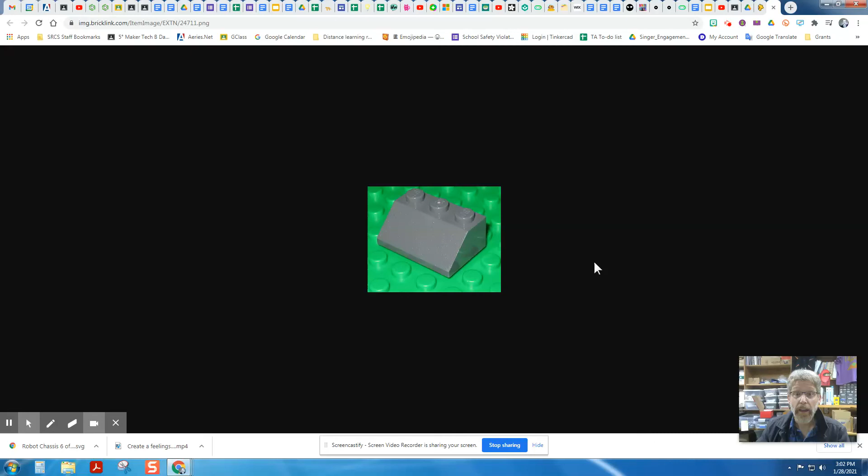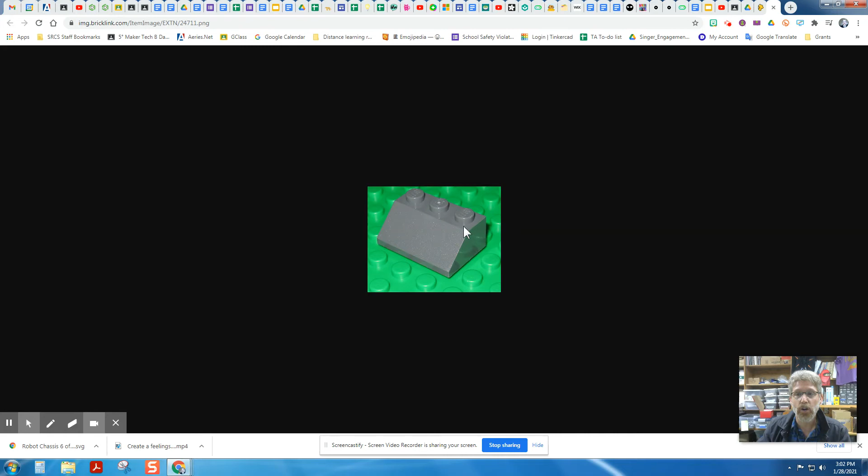Hey students, this is a tutorial on how to make a 2x3 Lego piece that has this sloped edge using a procedure called a chamfer. Ultimately, what we will have it look like is this. We'll be doing this in OnShape, and we'll be learning some more advanced techniques that will save you a lot of time and energy.

So we're going to start in OnShape, and you're going to want to create a new document. We're going to call this 2x3 Lego with, and then chamfer is C-H-A-M-F-E-R.

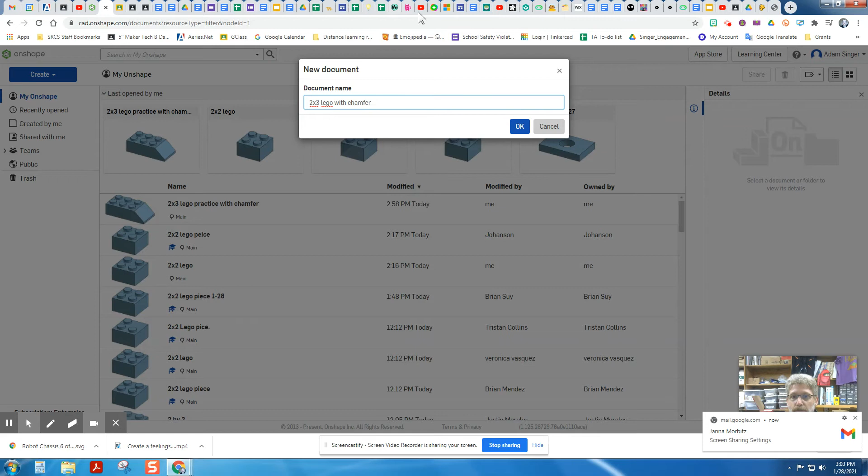Okay, so we're back here. The very first thing, this is super important, you need to get your units right. We want to make sure that for this Lego assignment we're building in millimeters. Go to this 3-line menu, go down to workspace units, and change the default unit length to millimeters, then click the green checkbox. That should get you set up well.

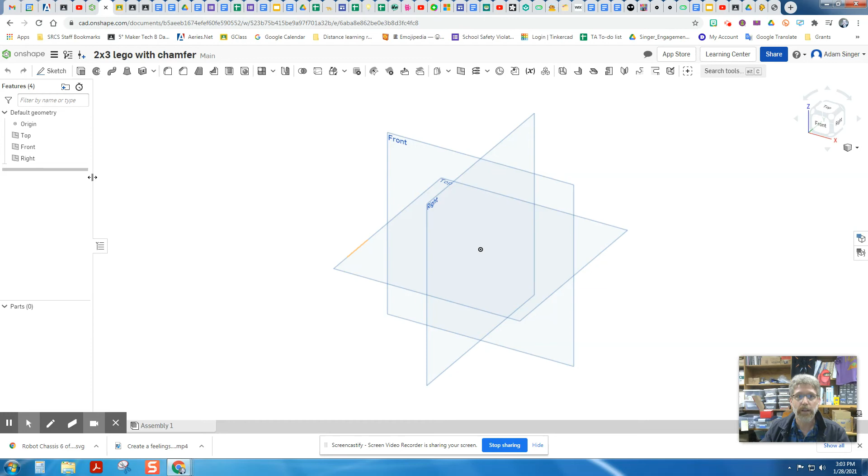So we are going to need to start here with our standard sketch on the top plane. We're going to click on sketch and click on the top plane. Once we have that, we can turn off the top, front, and right plane so we don't see it anymore. If you prefer, I like looking at sketches from above, so you can click on the top here and get here.

So we're going to need to make a 32 by 16 millimeter center point rectangle. Let's go to the rectangle tool while we're in sketch 1 and go to a center point rectangle, and let's just pull a rectangle out. It doesn't really matter how big it is.

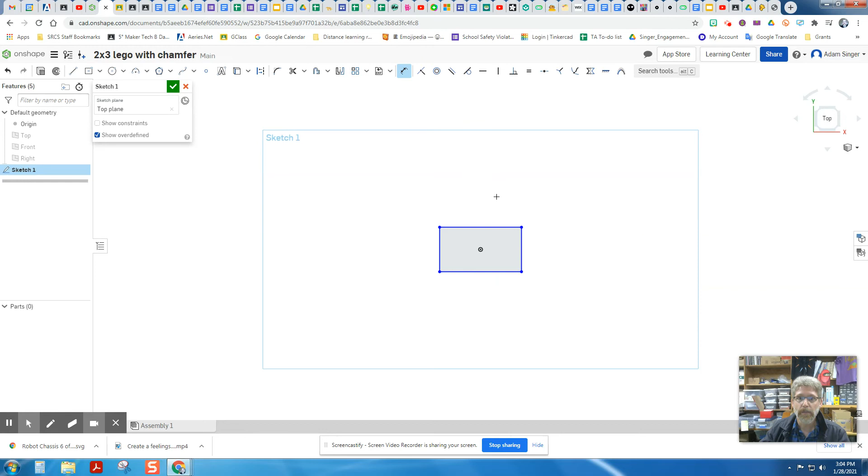So we will use next the dimension tool, as we've been using, to get our exact sizes. That's this 2-way arrow, diagonal. If you forget or aren't sure, put your mouse over it, it'll tell you what the tool is. Click on that, and we'll click on the longer side, pull that dimension out, and we want that to be 32 millimeters. Then we'll do the same thing on the short side. I can see that my dimension tool is still turned on, so I can just click this, pull it off to the side, and make that 16 millimeters.

Now we have beautifully constrained black lines, looking good. So we are done with our initial sketch here, sketch 1 is done, so we'll click on the green arrow. If you make any mistakes, don't forget that this undo tool right here is your friend.

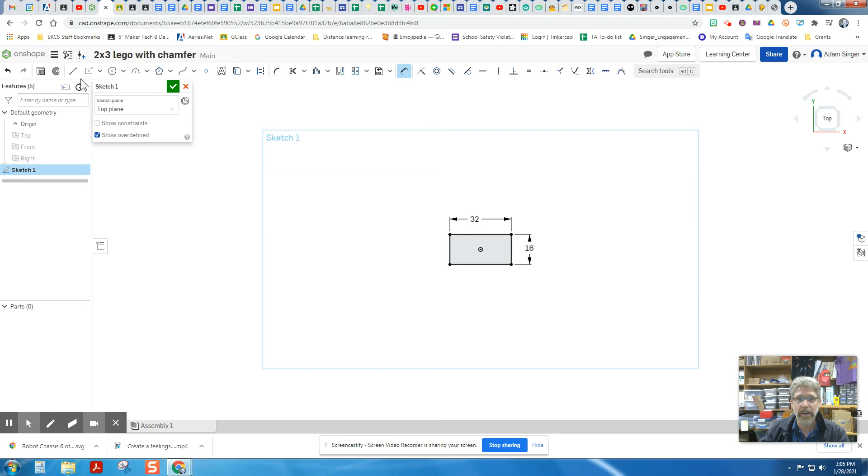All right, so next is an extrusion. It's always a good idea to look at items from the isometric view when you're extruding. So you can click on this little view cube down here in the menu and choose isometric, and we're back to here, and we can click on extrude.

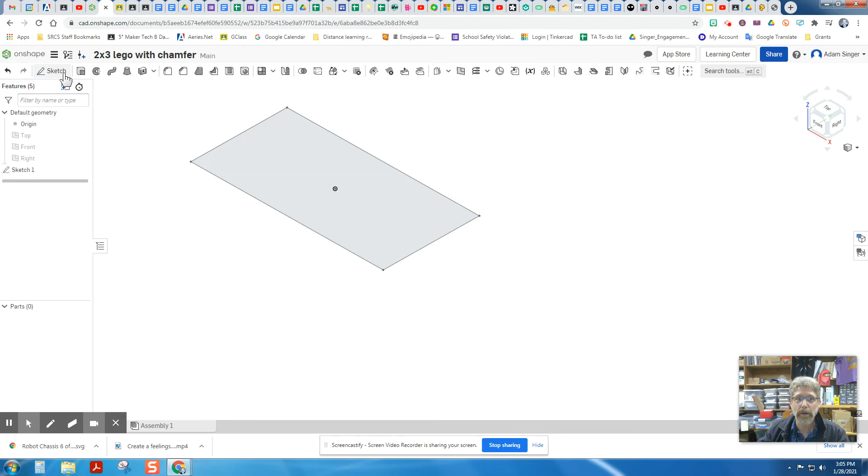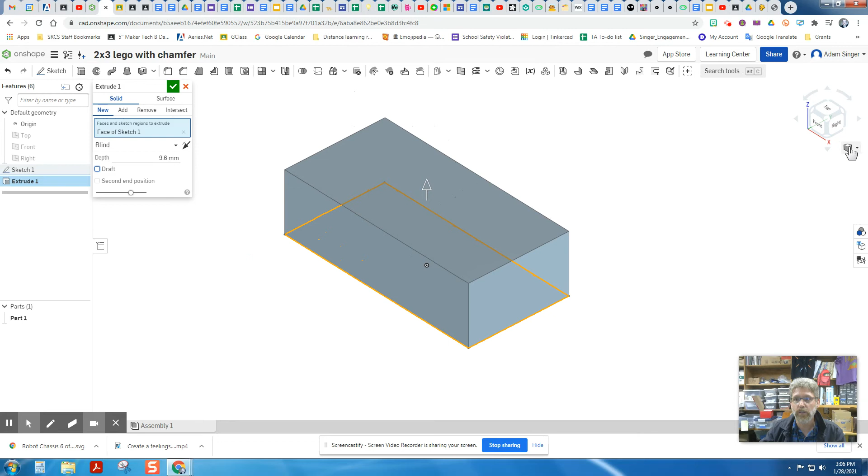That's this first button right after sketch, and then click on the surface we're doing here. We want to extrude, and remember, Legos are 9.6 millimeters tall. So let's extrude that up to 9.6 millimeters, and that's looking pretty good here. Let me see if I can move this back into the middle, and that's looking good. You can always go back just to isometric, and that'll work well.

All right, so we've got this brick done. So we can finish that extrusion, and you're all ready to go.

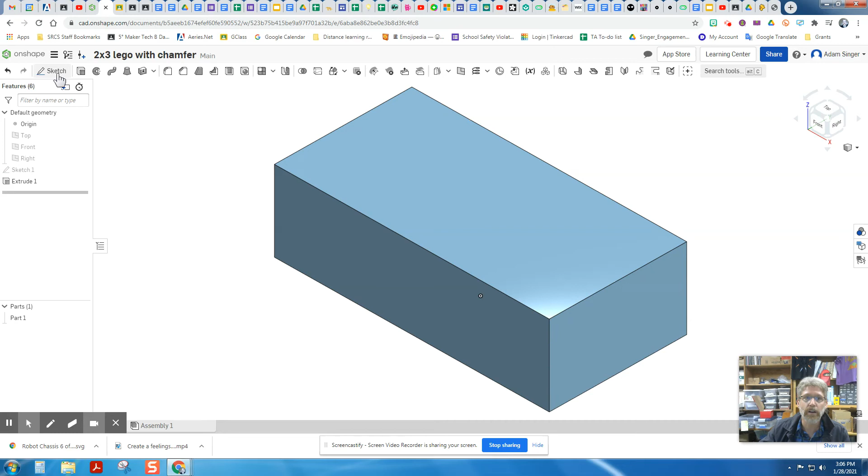Okay, so the next step here is going to be sketching on the top, and we're going to learn a new technique here that'll really save some time, but it does involve some new skills here, so pay attention closely. We are going to want to make a new sketch, this will be sketch 2, and we want to do it on the top of our brick. So I'm going to click on the top of the brick, and we've got that there.

I'm going to choose to do that by looking down from the top. I really recommend that, is looking at the top here. Now, before we were doing things by hand and having to constrain things a lot, using a huge amount of the dimension tool. We had to draw everything one at a time.

So today we're going to learn a different technique. We're going to need to place 6 circles in here in certain places. So we're actually going to be drawing some guide lines, called construction lines.

To do so, we're going to turn on the line tool, but we also want to turn on this button right here - it's got a line and a dotted line with arrows in between it. If we turn both of those on at the same time, that allows us to draw lines that aren't going to be part of our end result. They're just there to help us aim.

So what we're going to do here is draw 3 construction lines from the top edge to the bottom edge. Make sure the line tool is on and the construction tool is on. If I get my cursor on the top edge, click on it, then pull that straight down to the bottom edge somewhere, make sure it's straight up and down, and double click on that, it'll stay. If you single click, it'll start to try to draw another one. I'll show you what it does.

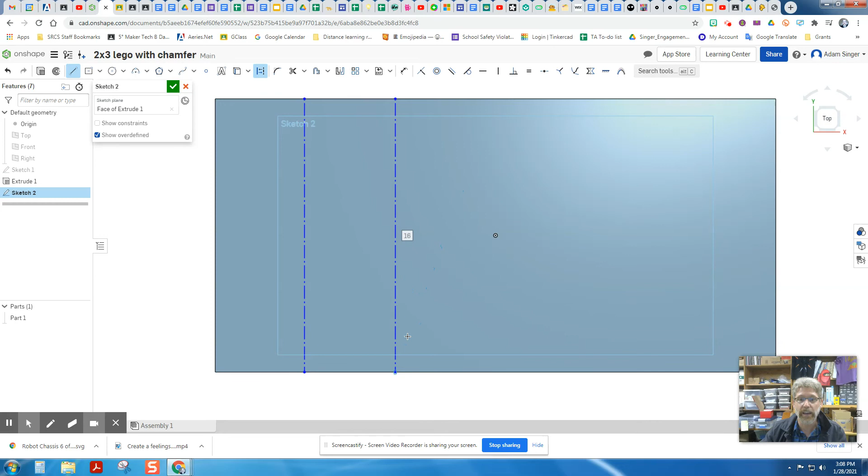If you click here and then single click on the bottom for your second line, you'll see it tries to keep it going. You can just end it by clicking it twice in a place. We'll want a third line, doesn't really matter where, straight up and down, and click there. Then, I forgot to double click.

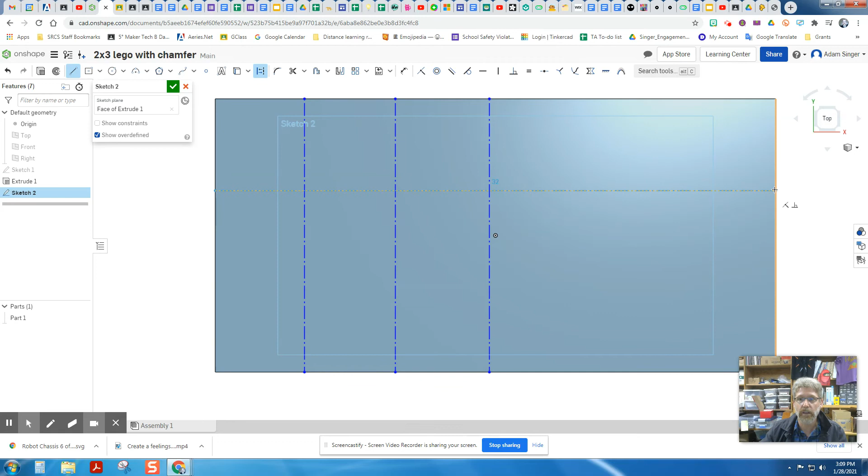There we go. Okay, then we're going to do 2 horizontal or left to right lines. I'm going to start on this edge, make sure it is nicely horizontal, and I'll double click there, and do one more this way. So you should have 3 vertical lines and 2 horizontal lines.

If you messed up, remember, undo is your best friend. So we're going to turn off the construction tool and the line tool, and this is going to help us aim. But first, we need to get these lines where they need to be. So yes, we're going to use the dimension tool.

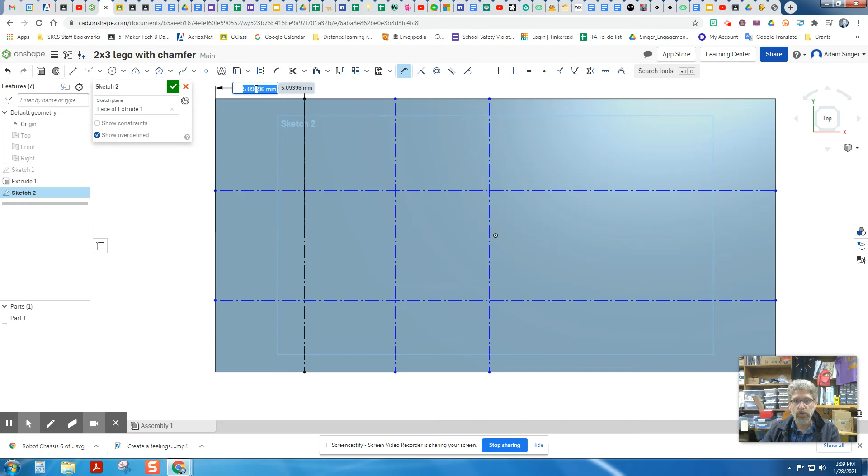We're going to make the distance from this line to this edge be 4 millimeters. We're also going to do the same thing between this line.

I'm going to make sure the dimension tool is on. You click once here and then on the outside edge. Click on that, and that should also be 4 millimeters. And then we're going to do that one more time here to here, and that's going to be 4.

So these are all going to be 4 from the edge, but these inner lines here are going to be 8 millimeters from each other.

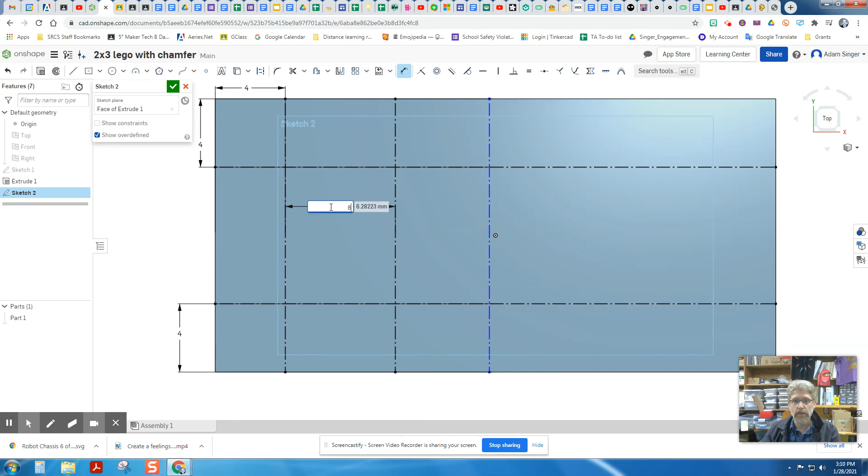So this next one, I'm going to click here to the first line, and that's going to be 8 millimeters. Same thing here, this one to this one - whoop, didn't get it. There, and we're going to make that one 8 as well.

You'll notice now all your construction lines are dotted, but if you have them properly constrained, they should appear as black. So looking good at this point.

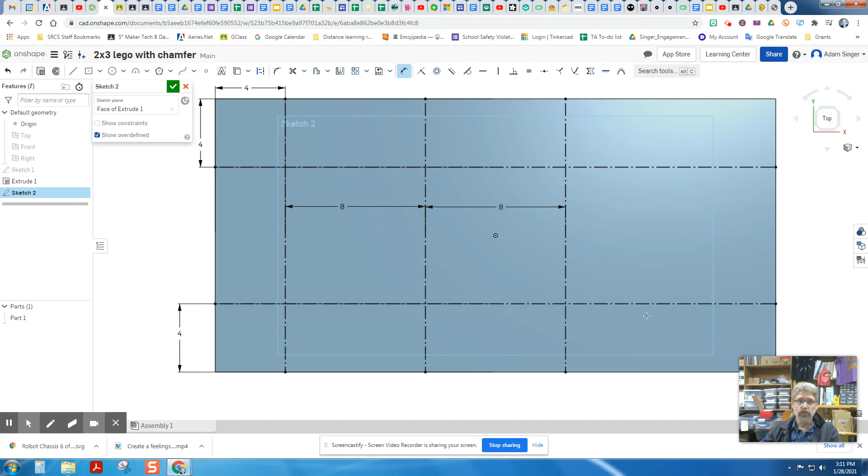So now we're ready to draw our circles. We're going to need a center point circle. Just like we did before, we're going to drag out a center point circle and then use the dimension tool to make it exactly 5 millimeters.

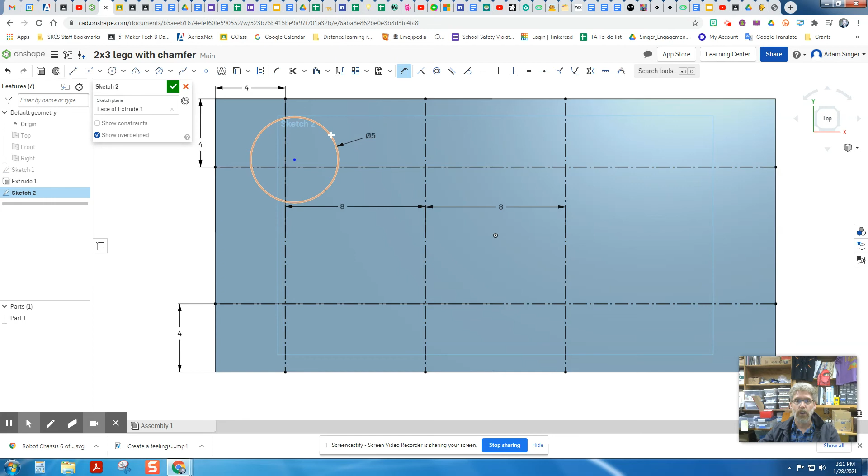Now, I'm not going to make you do this 6 times because there is a faster way. If you 2-finger click or right click on that shape, you can copy the sketch entity. You go into that menu, 2-finger click or right click. If you have a mouse, right click. If you have a trackpad, 2-finger click, or I think alt click.

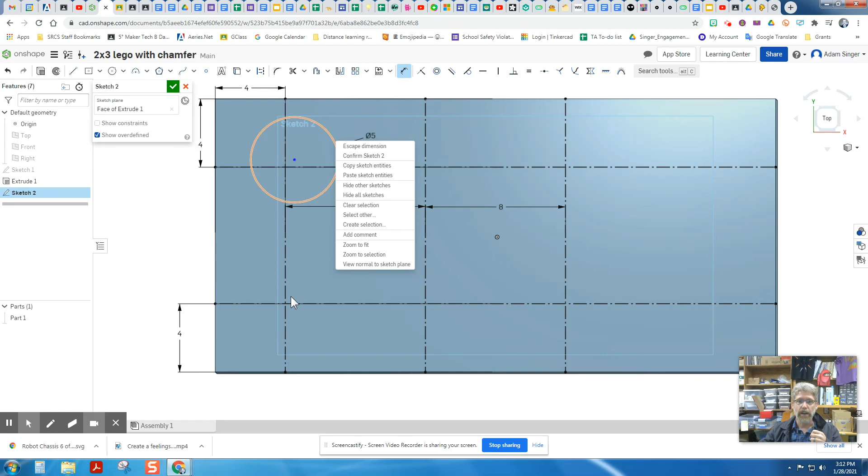Then you would want to choose copy. Then I can come down here and paste an entity: paste sketch entity, paste sketch entity, paste sketch entity, and paste sketch entity. So I've got 6 circles.

So what good did the construction lines do for us? Well, what we're going to do here is use another tool called Coincident.

So if you select the center of a circle, you can see there's a little 1 there now, and a vertical line, and this is a 2, so I have 2 things selected. You can see the little 2 next to my cursor, and the horizontal line. So now I have all 3 lit up: the center of the circle, the vertical line, and the horizontal line. What we want to say is those all go into exactly the same place.

They all come together, and there is a button called Coincident. It's right next to the dimension tool. If you're on a smaller screen, this might be a pull down menu with all of these here, but you want the one that has a line and a dot, 2 lines meeting together with a dot. So if you select multiple things and then click on this Coincident button, it'll make them all center on each other.

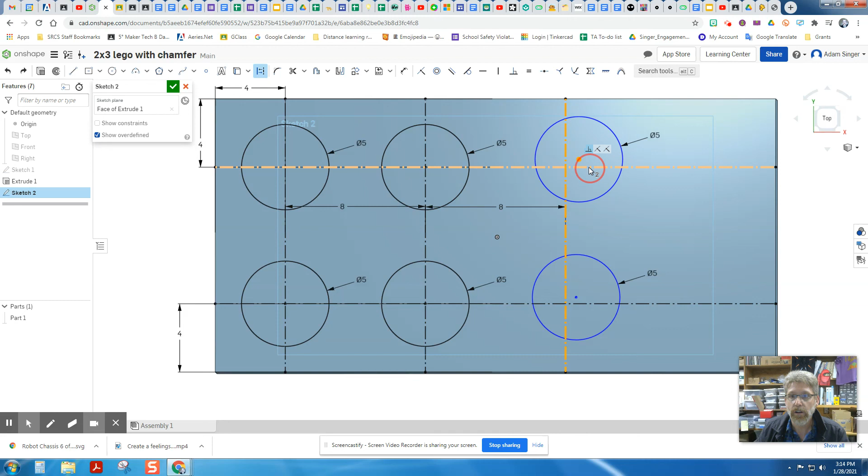Well, I made a mistake, so I'm going to click undo. Then I'm back here, and I'm not sure what I did, but undo is my friend. I'm going to select vertical and horizontal and select coincident, and that worked well. And then lastly, select it, vertical, horizontal, and then click on coincident.

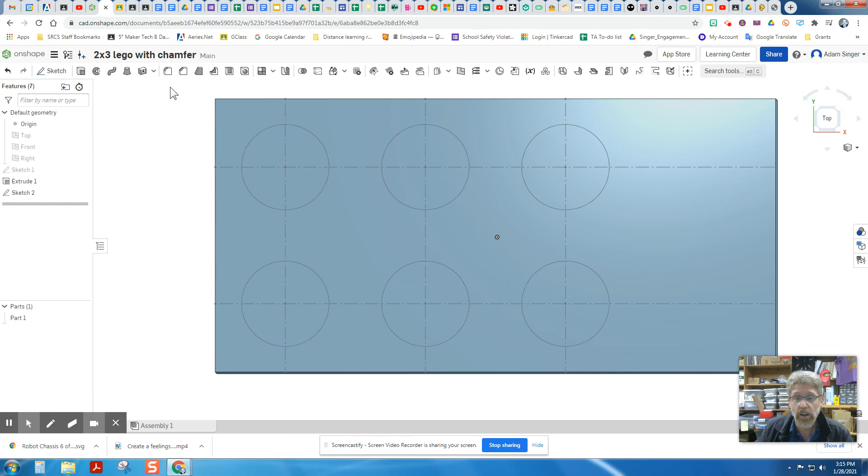So now those construction lines allowed us to know exactly where each one of these circles needed to be. So we're done with sketch 2. Congratulations, you're almost there. So we're going to go back to isometric view so we can take a look at this.

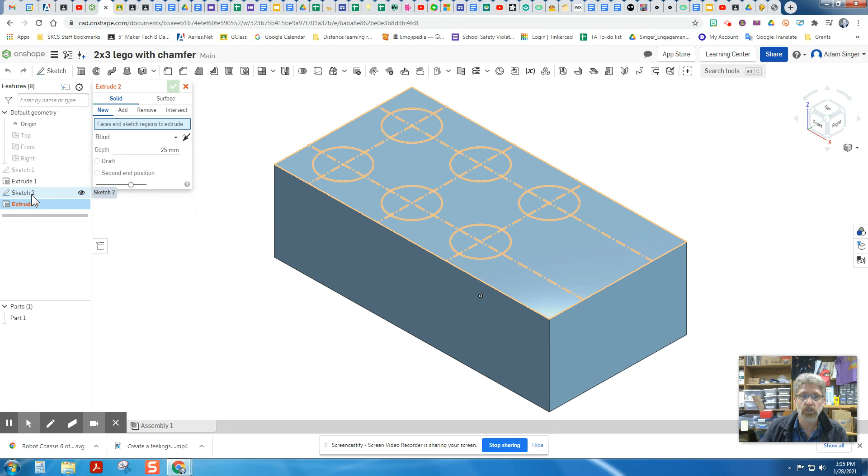Now we need to extrude all 6 of those. You do not need to click on each one individually. You can go to extrude, and when it asks what to do, you could click on each one individually, but that's everything that's in sketch 2. So instead of clicking on each one individually, you can just say, hey, I'd like to extrude all of sketch 2. So I'm going to click on sketch 2 over here in the side menu, and boom, it extrudes it way too much.

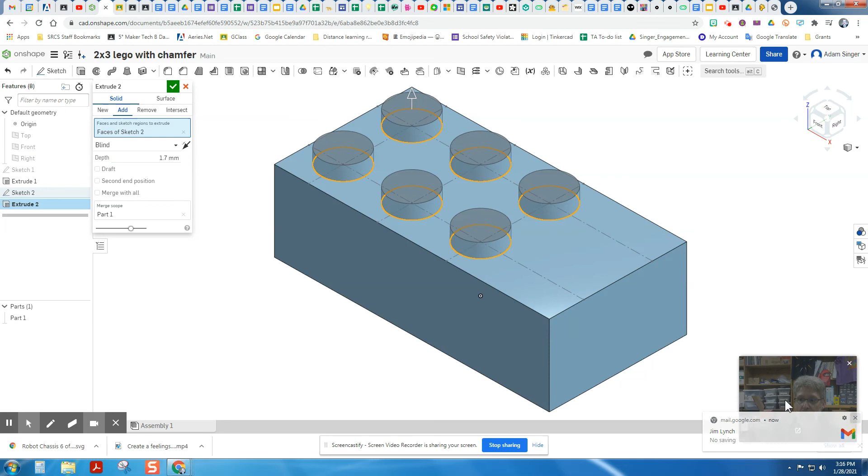You remember that Lego studs, the little parts that poke up, are 1.7 millimeters tall. So let's make that depth 1.7, and we will click on the check mark, and we're done with that part.

So we're almost done here. You have learned how to use construction lines, you've learned how to constrain construction lines, and you've learned how to use the coincident tool.

So lastly, we're going to take a diagonal slice off of the edge here. The way we're going to do that is using an operation called a chamfer. Now that's a woodworking term to take a 45-degree slice off of a corner. So what we're going to do is find this tool here. It looks a lot like the fillet tool that has a curve.

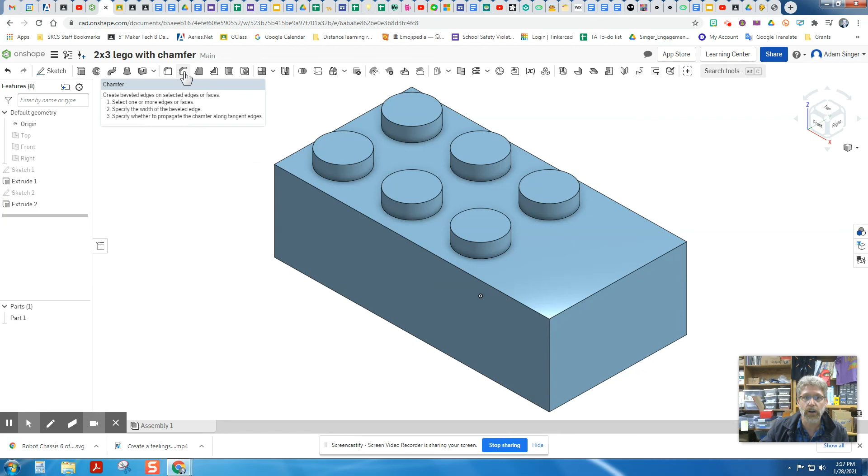You want to make sure that you're using the chamfer tool that has the 45-degree angle here. So let's click on that, and then it wants an edge, not a surface, but the edge. So make sure this edge is lit up and click on that. And then it's going to ask you how much distance we want to chamfer. You're going to want to chamfer 8 millimeters. Let's click on that, and that gives you the chamfer you need.

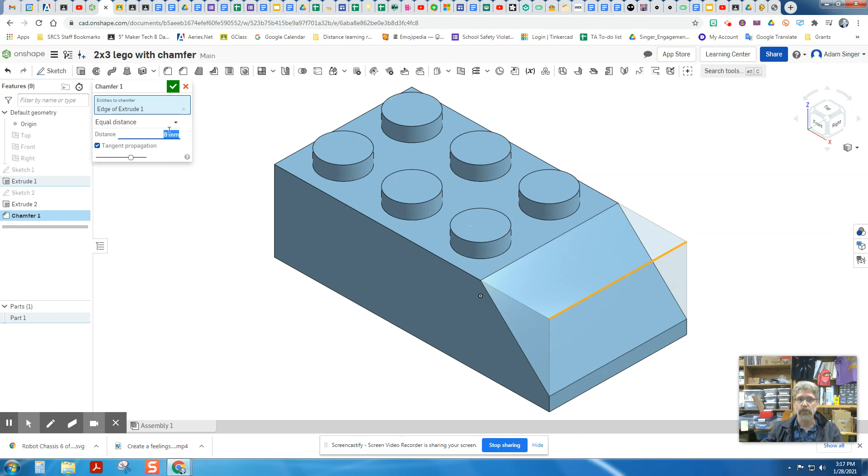And then finish that chamfer operation, and then you are good to go. We've got ourselves a beautiful 2x3 Lego with a chamfer in it.